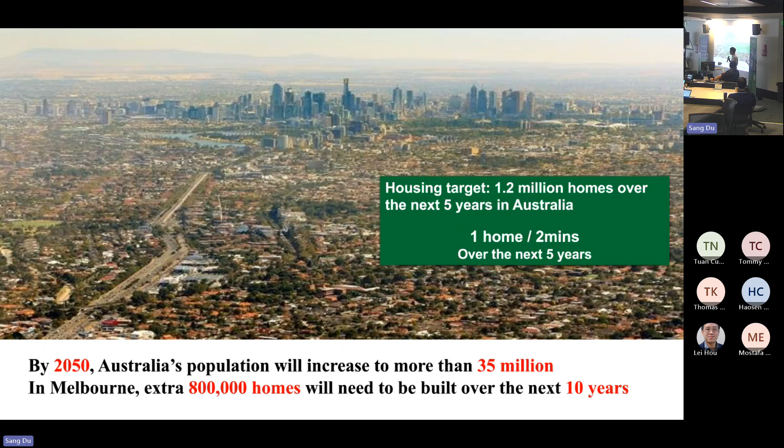So my talk is going to look at something a bit different. We are focusing on productivity, which I think is a huge problem we have in the whole country. The reason is because our government is committed to build 1.2 million homes over the next 5 years. That means every 2 minutes, we have to build a home. In Melbourne, we need 800,000 houses over the next 10 years. And of course, that's a big number. How can we get there? Because if we keep doing it the same way we are doing, we will never get there.

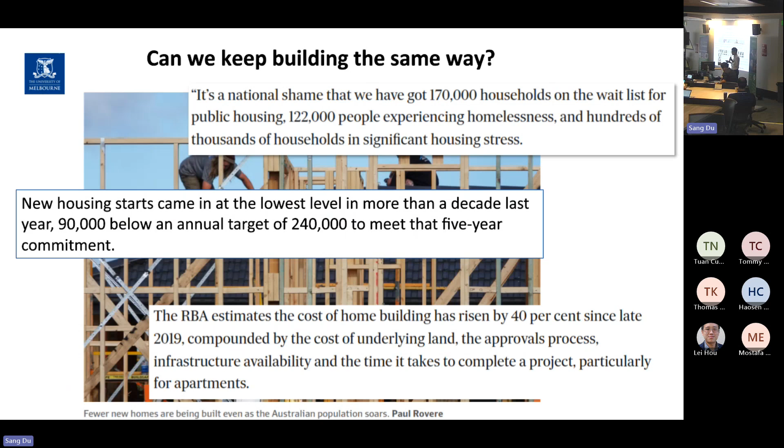You look at the figures last year. We are actually 90,000 homes short, because if we want to build 1.2 million homes, that's equivalent to about 240,000 a year. And last year we did less than 150,000. So there's a huge shortfall to fill. And of course, the cost, as we know, increased, especially over COVID, a 40% increase in material cost. And we look at all the statistics, the approvals, the completion rate, it's all on the way down from 2015. So we have a huge problem.

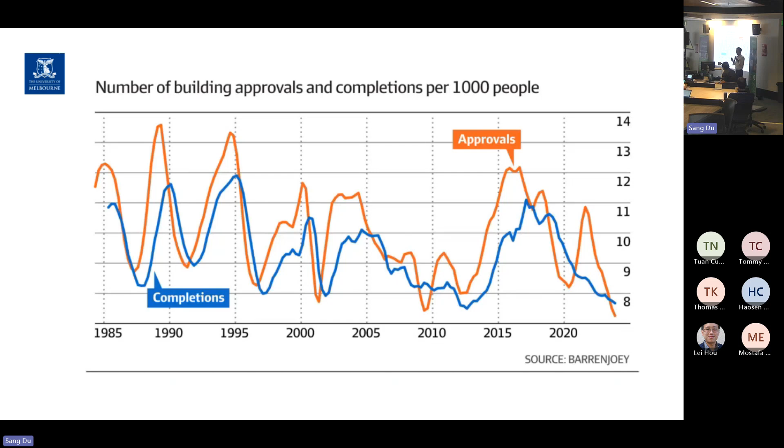And I think fundamentally, as a nation, we have productivity issues. And it's no surprise that last week the Treasurer, Jim Chalmers, mentioned this is the highest priority in the government, to address the productivity issues. There are many ways to quantify productivity, and you can see over the last 15 years the trend is coming down. So if we use the same input, investment, labour, we are getting less output.

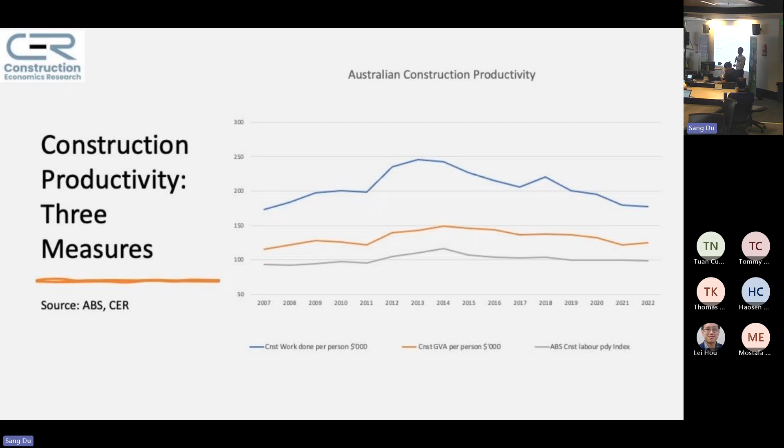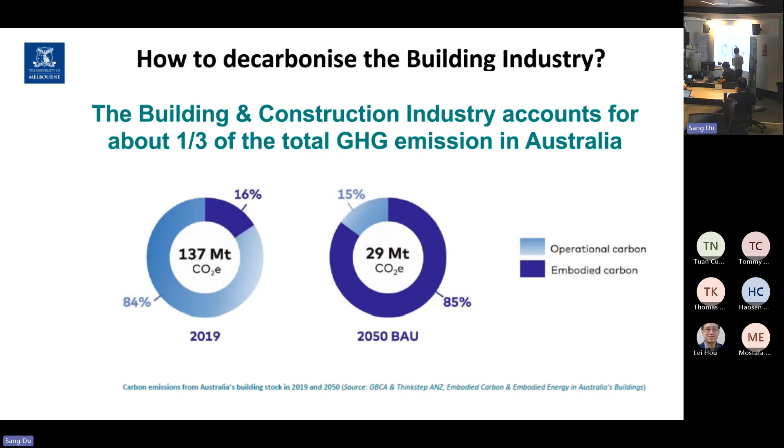Another challenge is, of course, the net zero target. Our construction and building industry is about 1/3 of the whole nation's emissions, about 137 million tons per year, and we have to really get it down. I think we can get better in terms of electrifying the grid, so we have less energy use in buildings. But we still have to look at the embodied carbon, the material we use in our buildings and infrastructure. So there's a huge challenge on that front as well.

So looking at the whole industry, I can characterize it into four main challenges. The first one is delays and cost overruns. Almost 1/3 of major projects get that increase in cost over time. And material costs are all on the way up; even if they've stabilized now, there are still a lot of challenges. And quality, performance, which I think Kate mentioned with some of the cladding, but it's bigger than that. There are a lot of issues about quality.

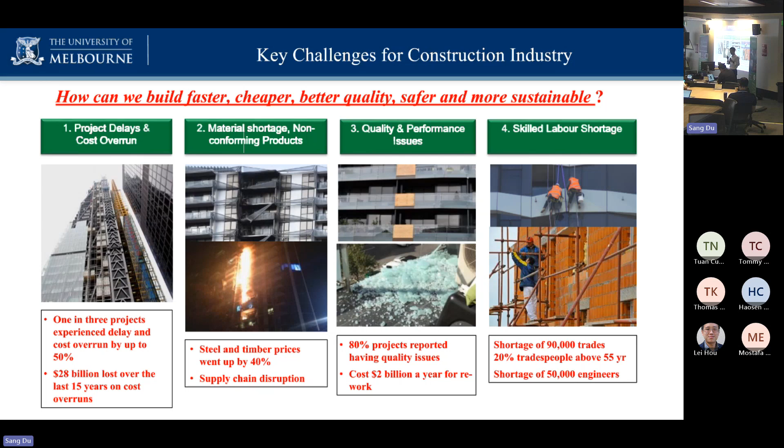And probably the biggest issue is the shortage of skills. Over the next 5 years, 20% of the workforce in our construction industry will retire. And a lot fewer young people are joining the workforce, so how can we fill that shortfall of almost 100,000 people in our industry? So we have to build a lot more with less. Less people, less material, less emission. And how can we do that? Because if we do it the same way, we will never get there.

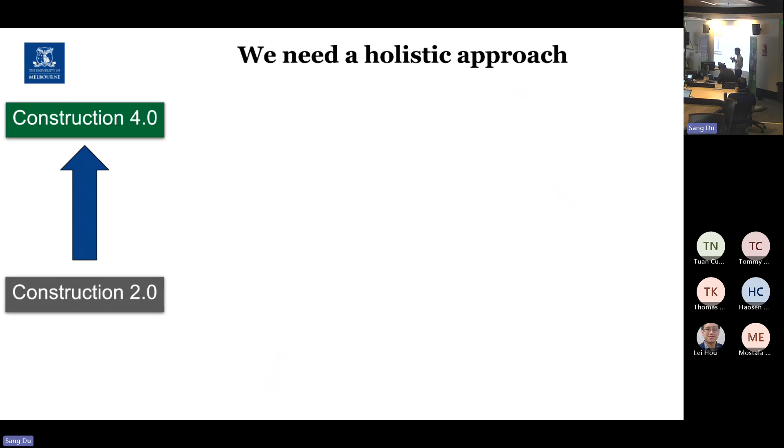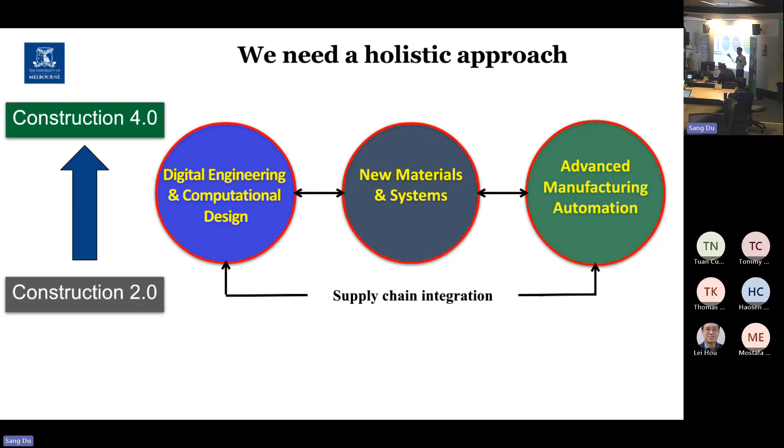So I think the overall holistic approach we've been thinking about, and many of you are working on, is how we can get better. We have Construction 4.0 as a principle, but it's not easy. We have to look at digital technology. Is there any new material system we can use? If we want to be more productive, we have to look at automation and offsite construction, which I've been working on for many years. I think that can address some of the challenges. But we have a very fragmented supply chain; many companies, a lot of the SMEs, struggle at the moment.

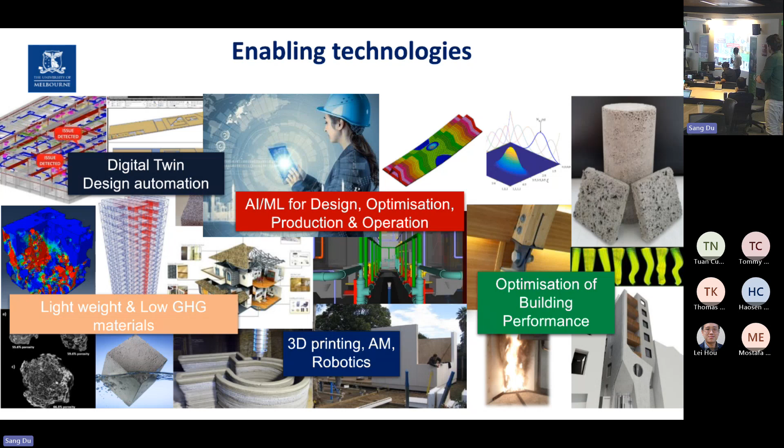So let's look at the next 15 years, to 2040, and what the industry will look like. There's a lot of talk about digital twins, design automation, AI and machine learning for optimizing production. We look at low carbon materials. We look at 3D printing, optimizing. So which one will give us the best outcomes? The thing is, we probably have to work on all those fronts. And we've been doing a lot of research to identify what can give us some good outcomes.

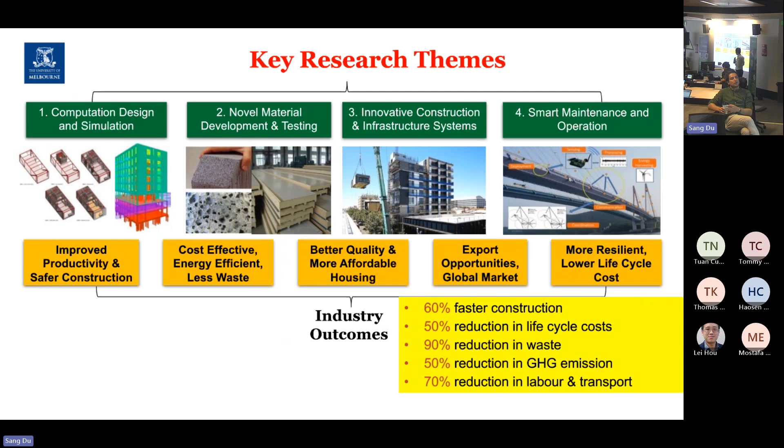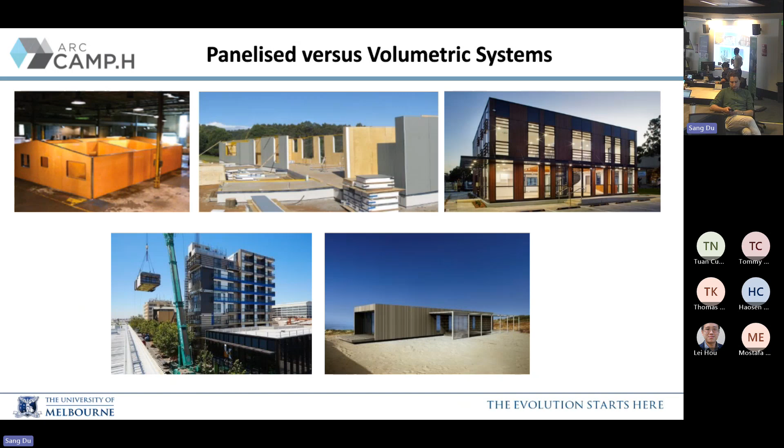Because if we can do well on those fronts, I think there's some big benefit from faster construction and reduction in the cost. So I will give you some examples. Starting with the journey, we've been working on modular construction for the last 15 years. It's really close to my heart. I'm so passionate about the industry. But I just want to give you a first example of how I started this journey.

So this is basically the first modular construction building in Australia, and I was very fortunate to be part of it. That was 15 years ago. A building called Little Hero, actually very close to our building here. And the vision at that time set by the architects, he said, typically a building like this would take 2 years to build. Can we build 90% faster? And of course, everything else, from wastage to traffic reduction. So very high ambitions at that time.

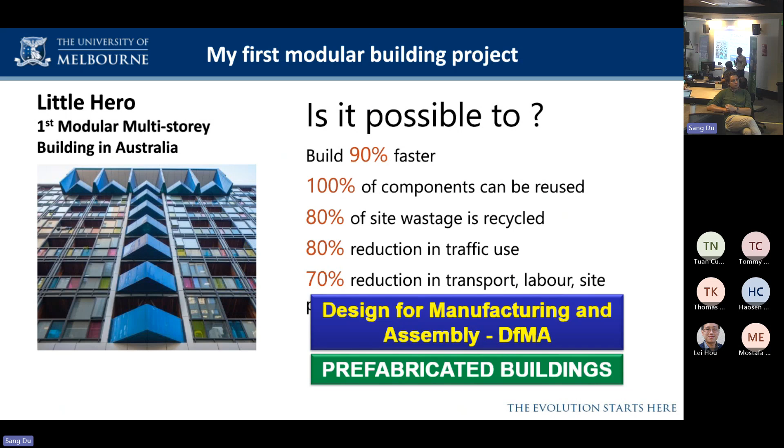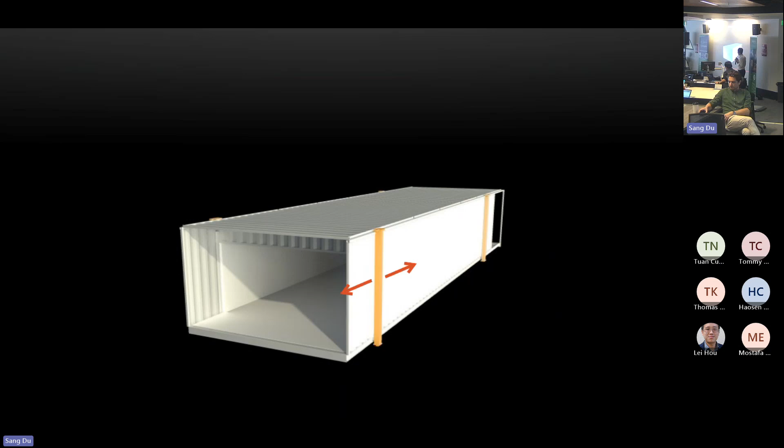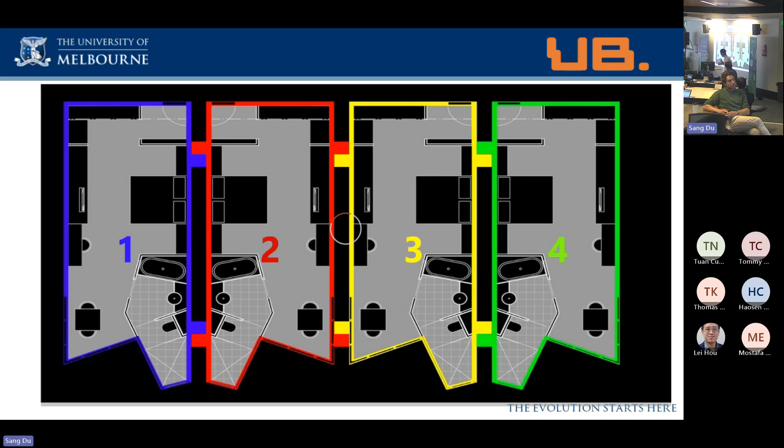Very slow moving. Okay, yeah, hopefully it will be faster.

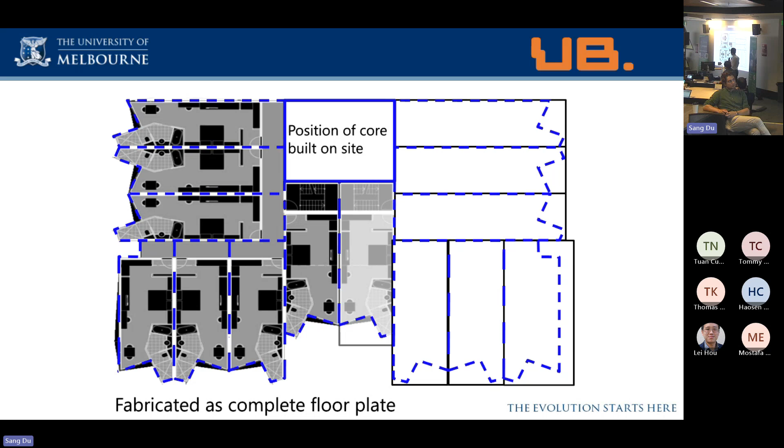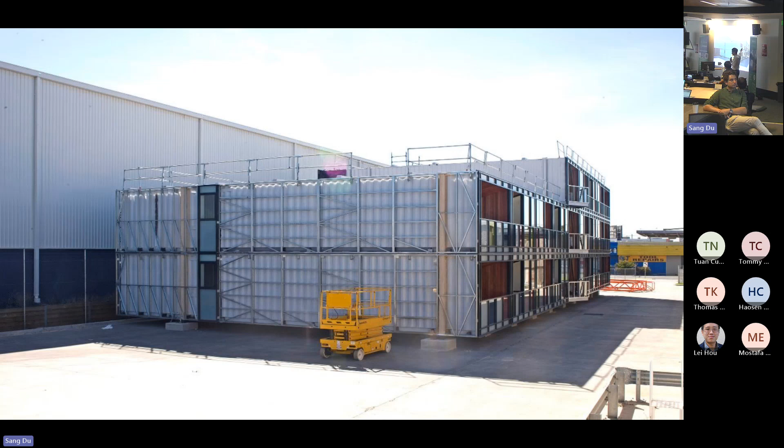So this is really just to highlight this concept of customizing different modules, but we can actually put them together in a floor and make it very much like a Lego block. And vertically, it comes down to connection, how we can quickly put that on site. So basically, this is the concept of how we design and the final product. It was manufactured in a factory in Brooklyn, which is not far from the Melbourne CBD.

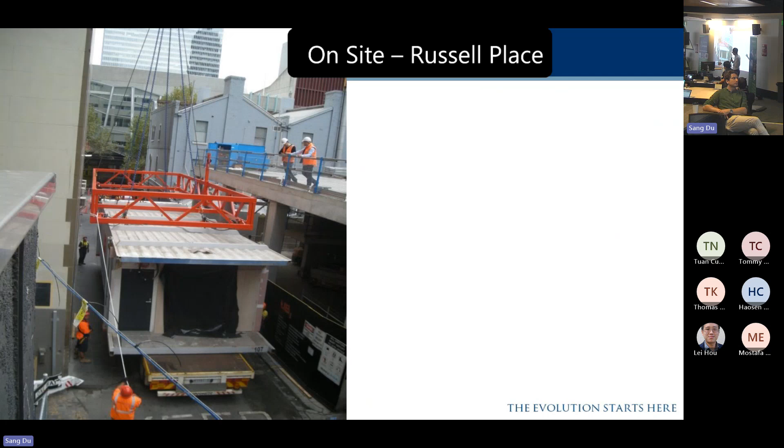But when we bring that to site, many people know a typical Melbourne street is a very small lane, only just enough for the truck to get in. And you can see the effort of putting all those 68 units together. And we did that in 9 days. That's really one of the best outcomes. We showed that it can be done a lot faster.

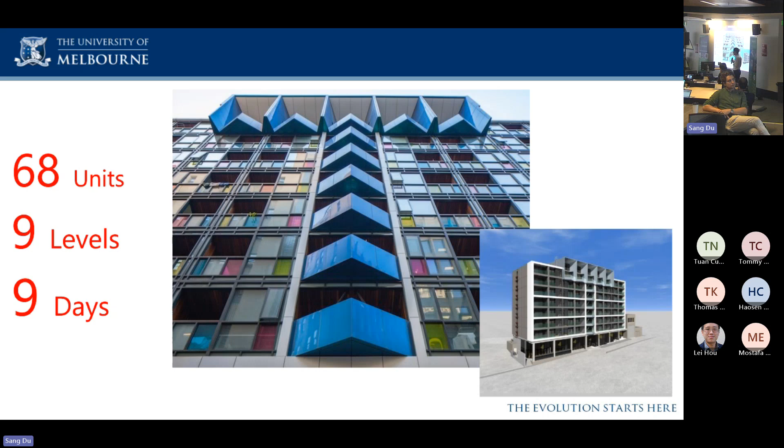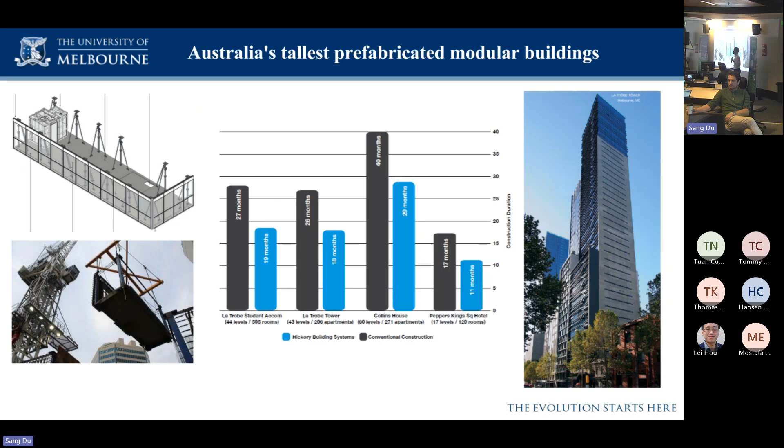And after that project, we were involved in setting up the big prefab box, and then working with companies like Hickory to change that model. We don't have to do everything in the factory. So that's the GAP system. It's semi-finished, but provides a lot better cost effectiveness in delivering. There's a building, the tallest modular building, Collins House, 60 stories, done that way. So it was proved it can be done, but it's not cost effective. We can do it a lot faster, but the cost per module is quite high.

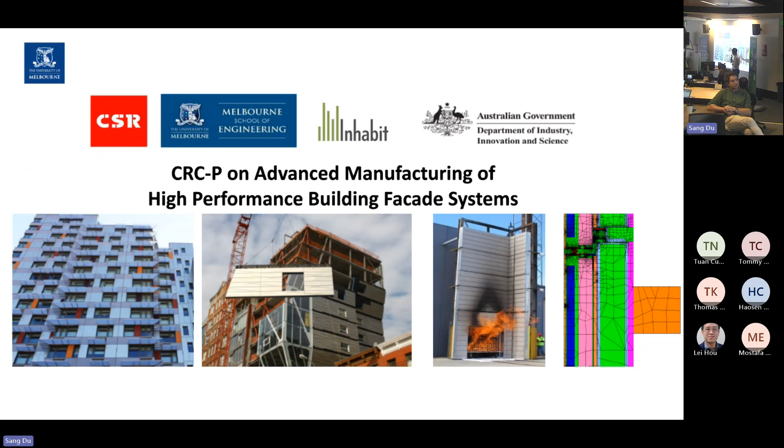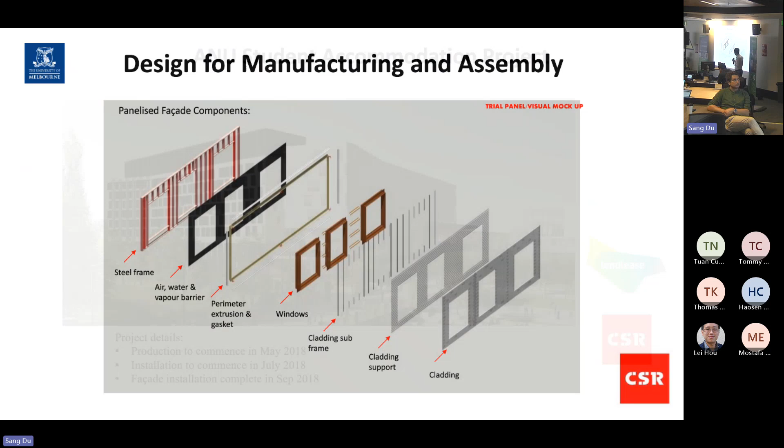So we looked at another system, another CRC project, where we looked at the panel system. Panels are another way to break down our building structures, but we have to design them to be a lot more high performing in terms of structure, energy and protection. So basically it's a multi-layer system, and all that can be designed to be put together in a factory. And we also showed it can be done a lot faster, with about 30% time saving. The first project was completed with Lendlease and CSR in Canberra.

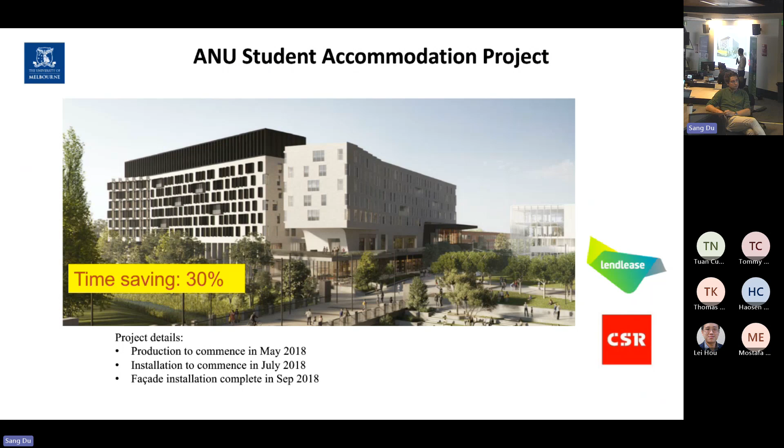And I just want to highlight how we actually look at productivity in this case, because again, we can do it very quickly in the factory. But when we move to site, there are so many issues. Tolerance on site is very different, because for each panel the tolerance is about a few millimeters, but on the construction site it can be 20 millimeters, 30 millimeters. So how can we quickly detect which panels might not fit in?

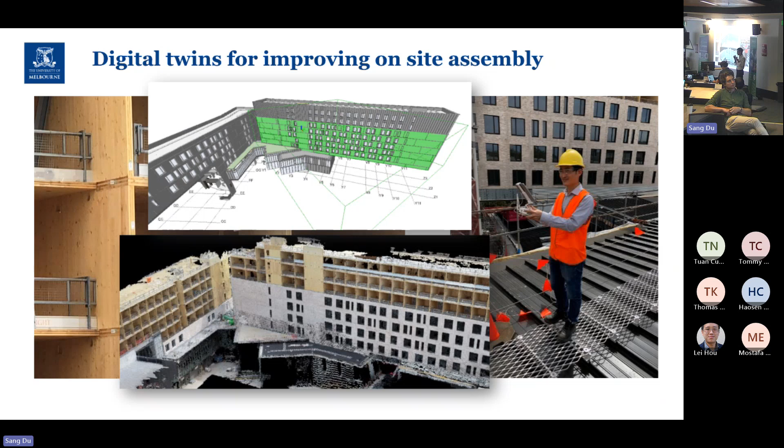Using a digital twin, in this case we combined photogrammetry plus LiDAR. We scan the whole site and look at how we get the data quickly to inform the crane operator and the installation team to match and see any issues. Because I remember the first few panels took more than an hour to install. But after we used this, it came down to less than 10 minutes. So it's about a six-fold improvement in productivity. I think that's quite a good outcome.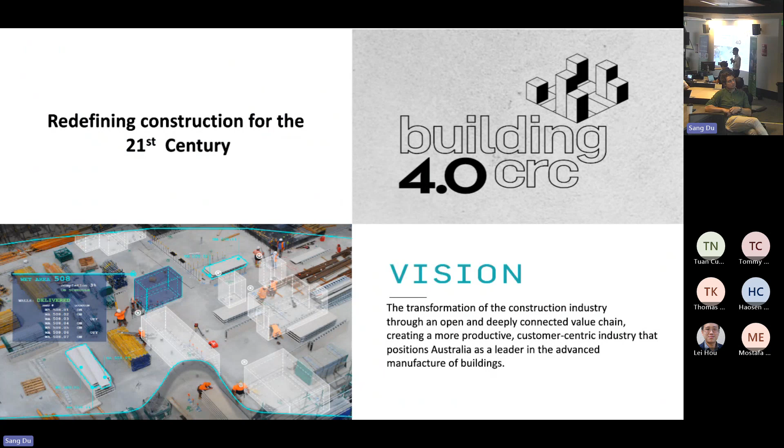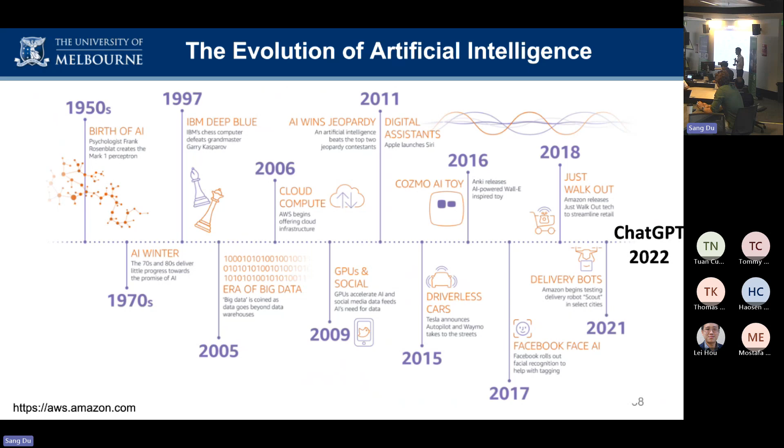So after that project, we moved on to look at how we can work with the whole industry, and that's how this Building 4.0 CRC was established. The main focus is to look at how digital technology can be adopted. We look at the history of how long computer science took to develop, from 1997, the IBM Deep Blue, up to the point where everything started to jump after the large language model. But in our industry, it's not that easy.

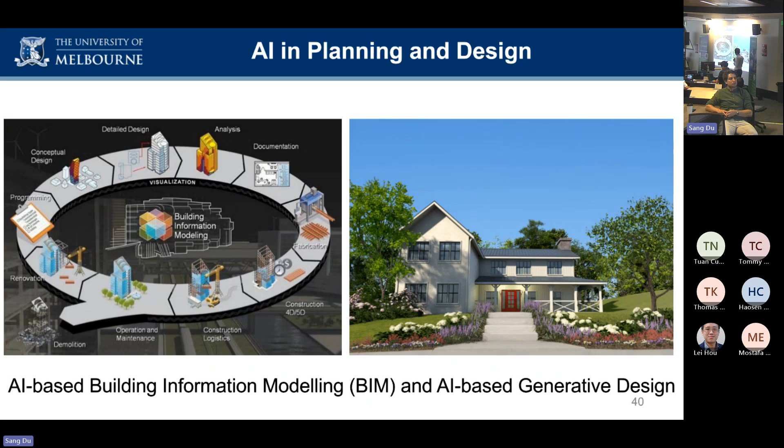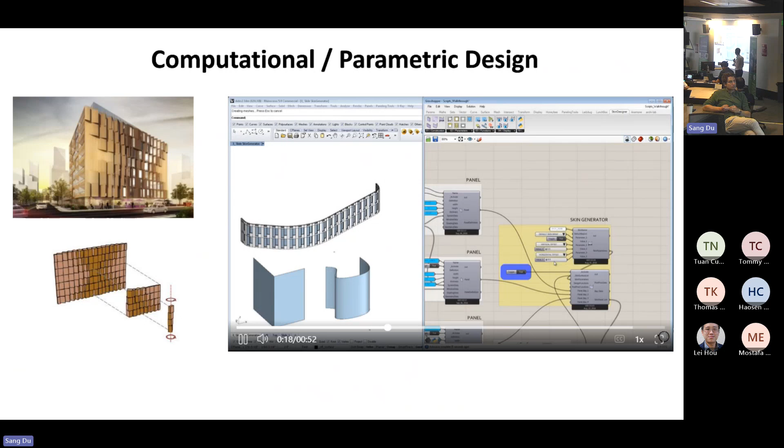When we started the CRC, we tried to map out what we can do better, starting from planning and design. So we can do a lot better with the design. Basically using generative AI, we can quickly generate many design options, optimize them, and come up with better solutions. We started with typical computational and parametric design. The facade system, as I mentioned before, might take a long time to optimize, but with this parametric model, we can quickly change and design it better. And this is a good project to highlight what we did differently. I hope the video can run.

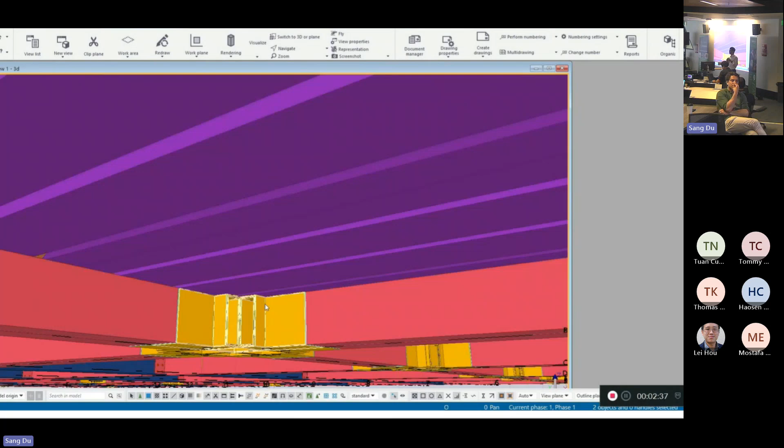Okay, yes. So again, this is the project. We aim to almost 90% automate the design process, working with a partner. Of course, these are modular buildings, but using steel structures. We try to look at the typical design process. It might take a few months, but can we do all that in probably less than half a day?

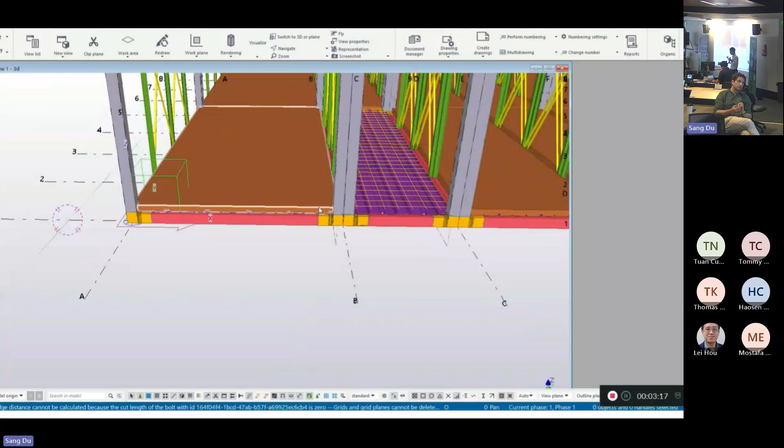We even automatically check the compliance, look at the connections and optimize them, looking at even the structural and design calculation. We actually can automate about 90% of those steps. Of course, it can be done, but how it can be practical in the design office is another question. But I think that the technology can get us there.

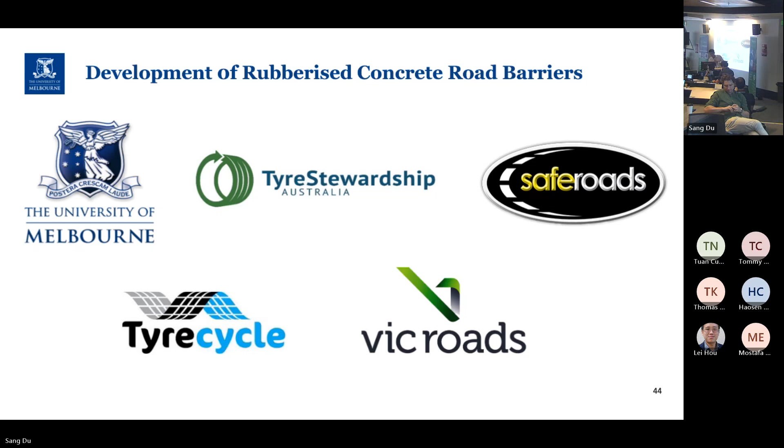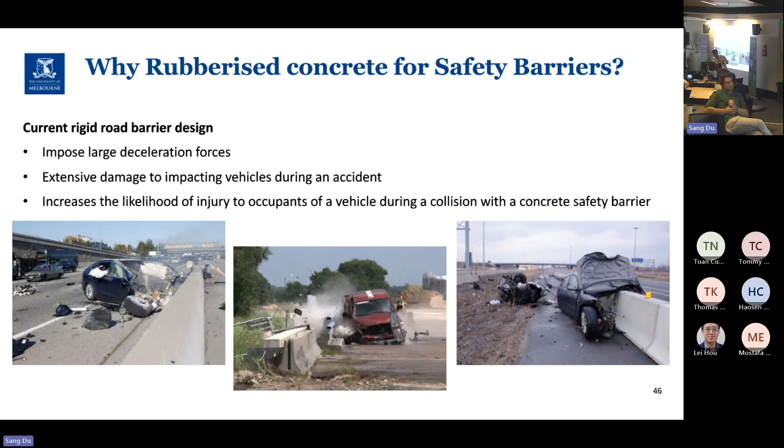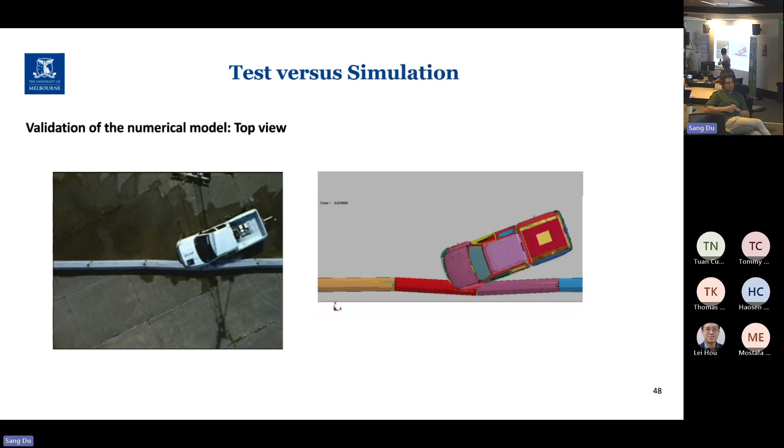Another project looks at the material part, where I got the opportunity to work with a company to use rubber waste in making road barriers. Because the good thing with rubber, again, is, there's a video here showing, we can get a lot of ductility out of the rubberized concrete. And then when we put it together and make barriers, you can see, this is the rubberized barrier which passes all the standards.

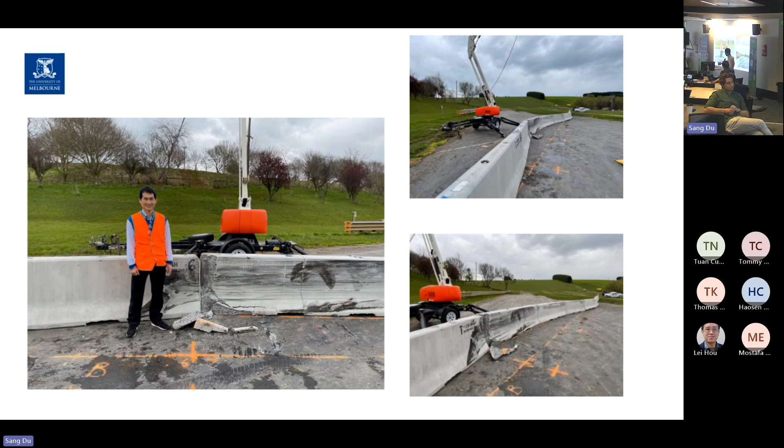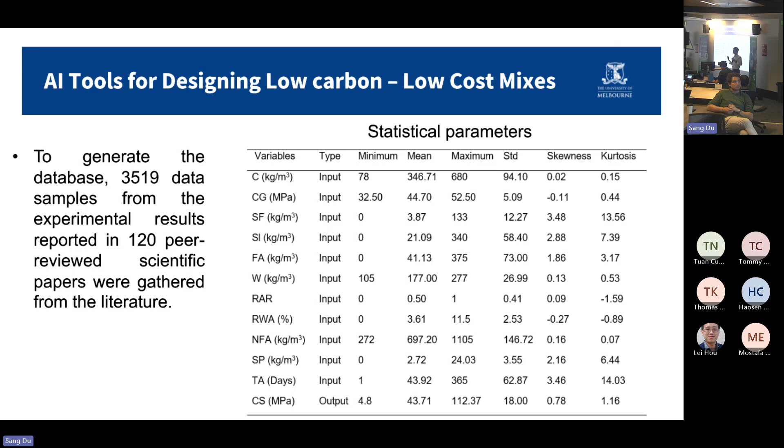And we are very fortunate that after the successful test, the barriers have now been used in some of the major projects in Victoria. But the question is how we can accelerate the design of the material, because we want to have low cost, low carbon mixes. And it took us probably about 2 years to try many different mixes. Can we use AI? Can we use data and machine learning to get the data from past work and accelerate the whole design process?

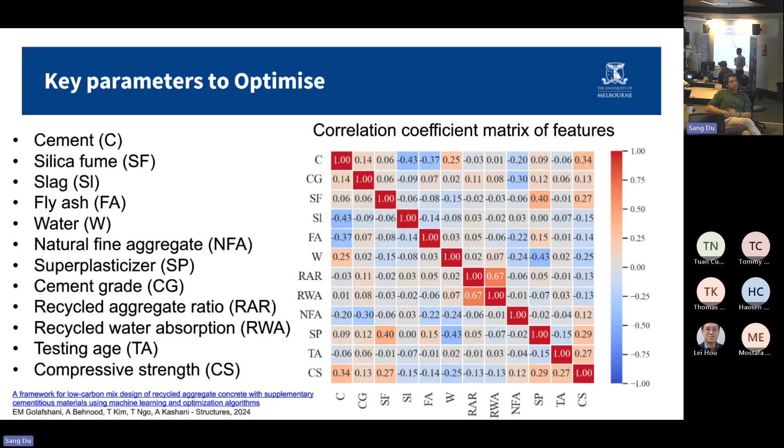And this is a paper that came out of some of the previous studies we did. We try to optimize from many different databases from existing or previous studies, but also using our data, and it gives us the optimum mix. If we want to optimize the cost, if we want to optimize the carbon emission, we can get all that. And from the AI and machine learning database we can do that in maybe just a couple of minutes.

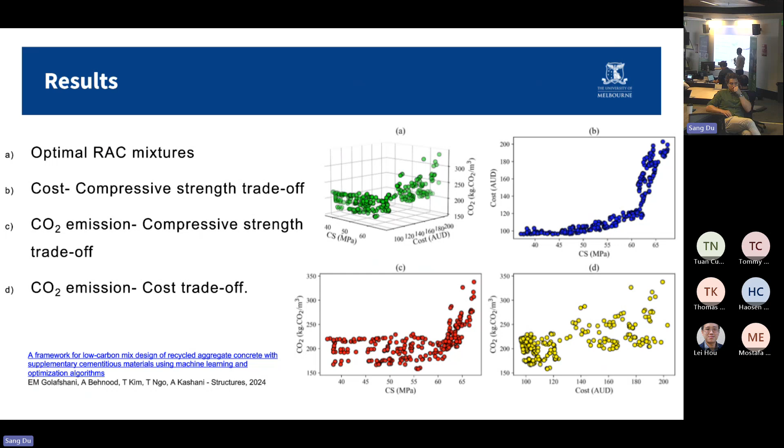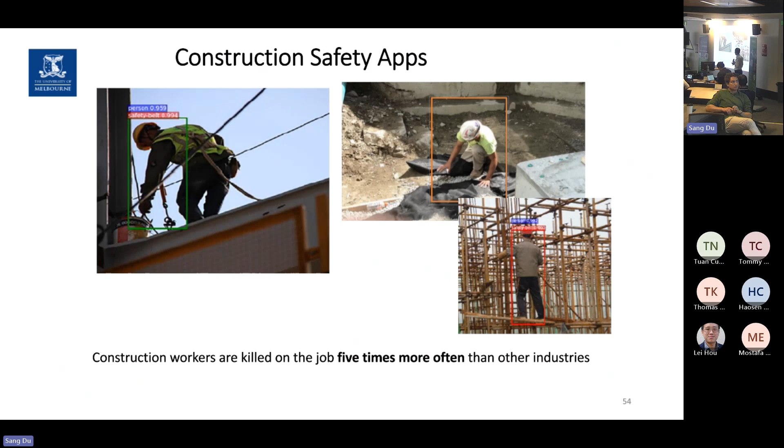Probably I'm running out of time, but quickly I'll show you another aspect of productivity, because construction safety is again a big issue if you want to address productivity. Because the injury rate in construction is the top compared to other industries, how can we actually come up with a system to really reduce all the work we need to address safety?

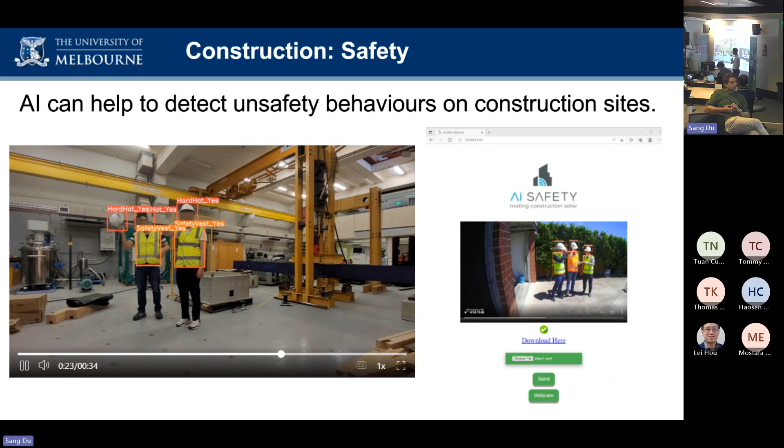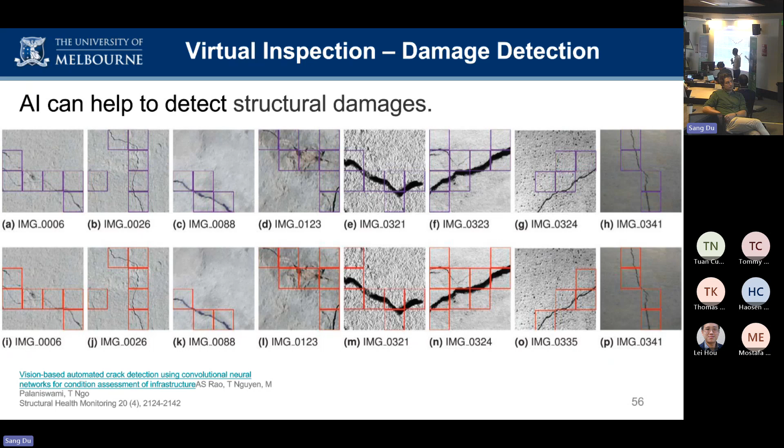So this is our lab in our university, and we use this AI safety tool to be able to detect different behaviors, different requirements when it comes to safety around a particular machine. And that also leads to detecting cracks, which I think Young Zhou presented earlier. So we also look at how in real life we can get a lot of drone images. Can we quickly turn that into the quantification of damage in bridges or buildings? Again, that's going to come a lot more in the future.

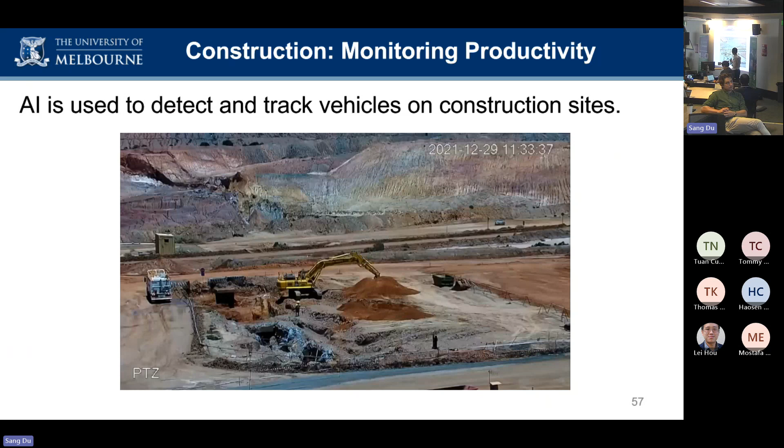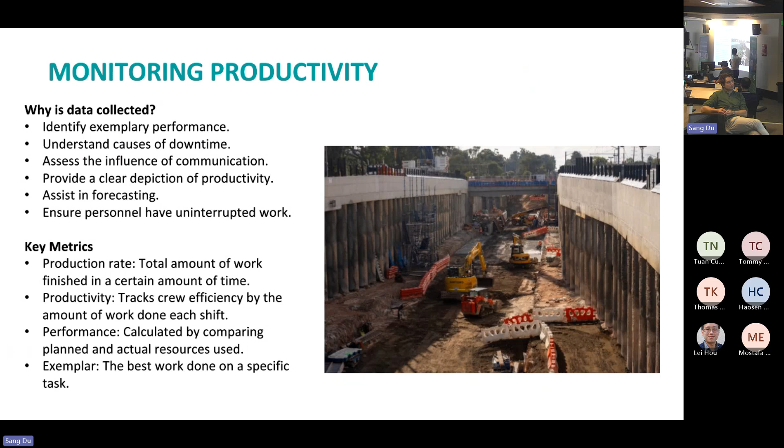The last one I just want to show you is about productivity, but for infrastructure projects. Using AI and computer vision, in this case working with the level crossing authority, we show that at the moment, manual-based productivity monitoring is very time-consuming and very unreliable. So using AI and machine learning, we can actually digitize and also automate a lot of the process.

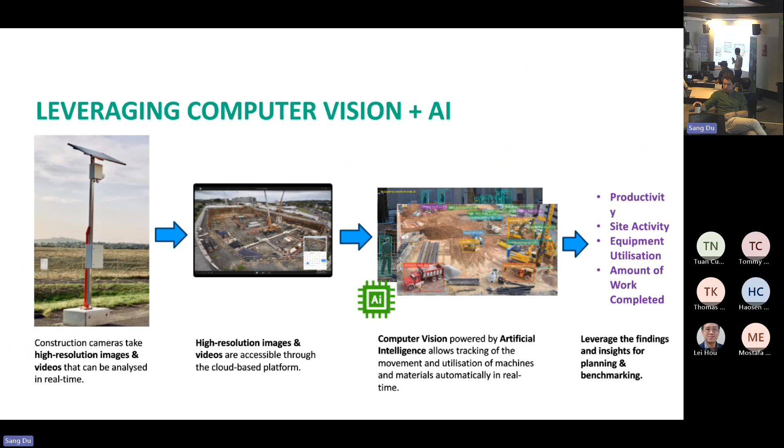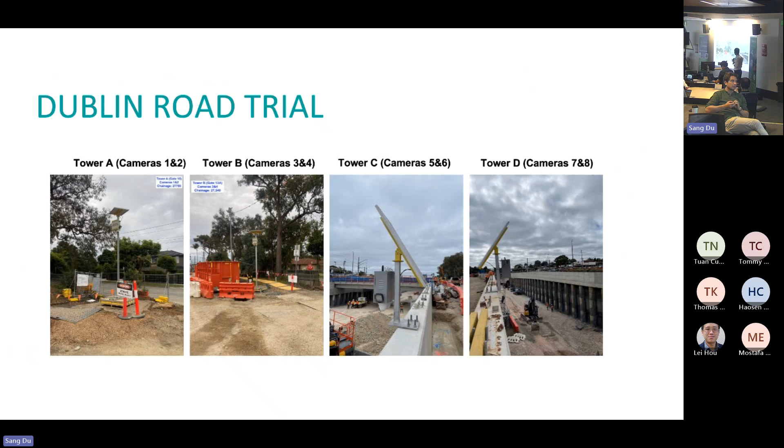So with the project, we got permission to set up a series of cameras and work with a software company to use the AI algorithm to automate the monitoring of the whole project along the Dublin Road. So 8 cameras were installed. We look at different locations, and we look at how we can actually use our algorithm to really pick up human activities, machine activities, how many panels we install, and that can be done fully automatically.